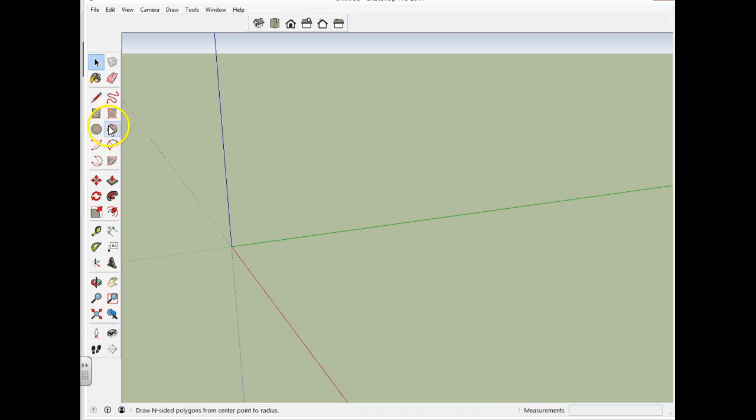Okay, we're going to begin with a rectangle. This rectangle is going to be, let's call it about 27 feet long. If you're over 20 feet, that's good. What we're going to do next is just raise that rectangle up so it looks approximately like this. After that, I want you to come in. Okay, now it's quite a bit shorter.

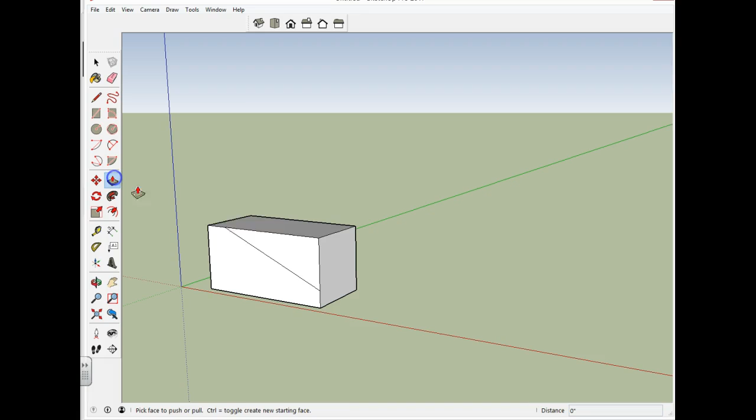I'm going to come in with my pencil tool, and we're going to touch right here and down to the base, and then push that area away so we're left with a shape that looks like a ramp with two flat edges on it. What I want to teach you about today is the tape measure tool, and that's what we'll do. We're going to find out several different ways to use our tape measure.

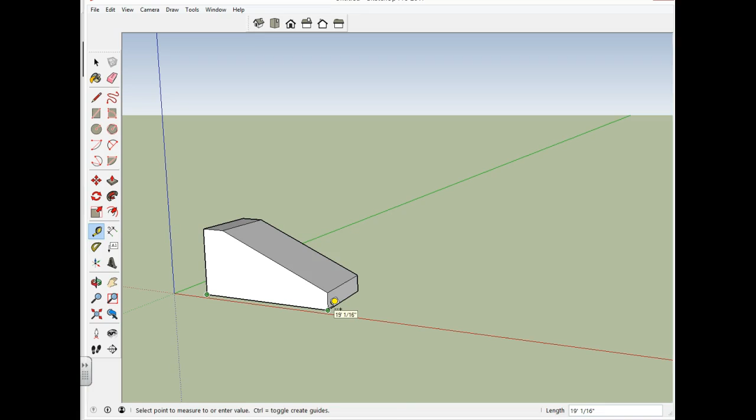So from endpoint to endpoint, you can see I'm about 19 feet long. I want to make that bigger, so I just type in 20 feet and resize. Okay, now that we've got that taken care of, we're going to come over here. Once again, we're going to use the tape measure tool, and now we're going to cross diagonal end to end.

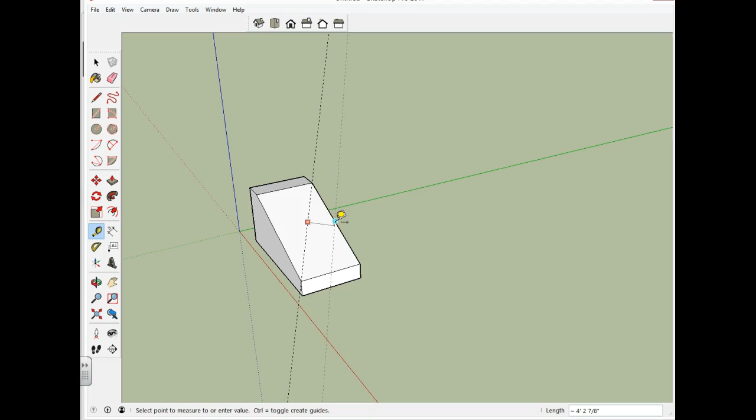And I want to show you that you can offset that by just inferring the middle. You can see how that becomes something to itself if I can find the middle here. And now these are both offset on the face to the midpoint. We're going to come across on the other, and this time we're going to infer no geometry, so don't infer anything, but type in 2 feet, and then it will become the 2 foot mark over, like that. Come over here.

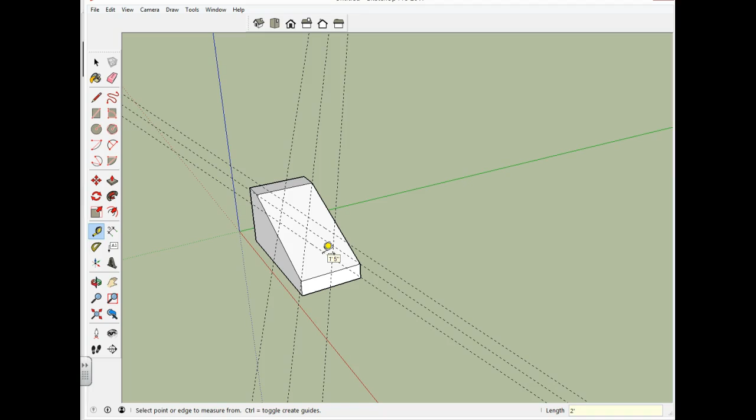It may ask us, hey, do you want this to be 2 feet? If not, just type in 2 feet again, and now you're going to have that offset where it needs to be. We're going to come in with the pencil tool, and we're going to make sure that that all gets squared away. Make it just like this, and now come back with a 2-point arc, and from endpoint to endpoint we can come up and hit that. Good.

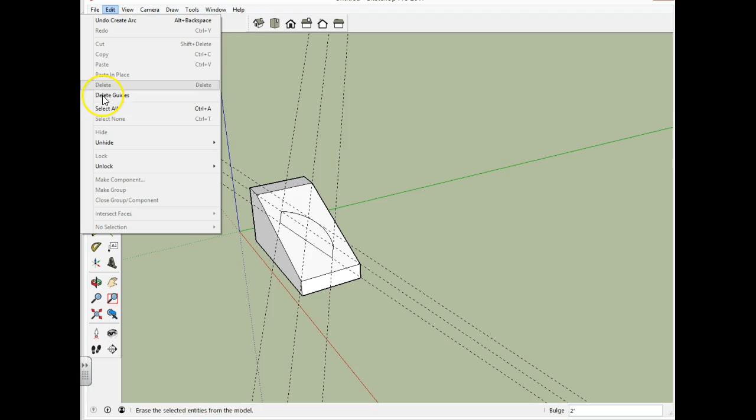Now let's go in and delete our guides. That was just edit, delete guides, and the guides go away. We're going to use another tape measure, this time from the midpoint going straight up in the air, so I can show you that push-pull actually works. If I infer to that line, it will go right as high as that line, and that's it. So that's how that works.

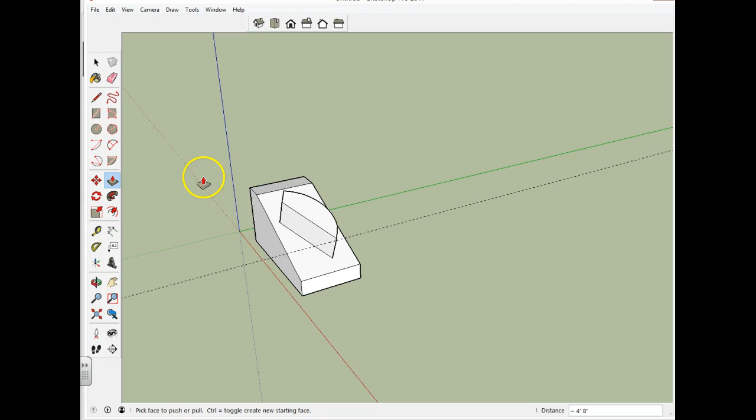What we're going to do next is come back in with another tape measure, but this time I'm going to make sure that I don't infer any geometry. When I click and it's on red, you can see how those cross references happen. And now I'm going to go out and make another line from that intersection at 25 feet. So click that, 25 feet. We now have another line we're going to start from.

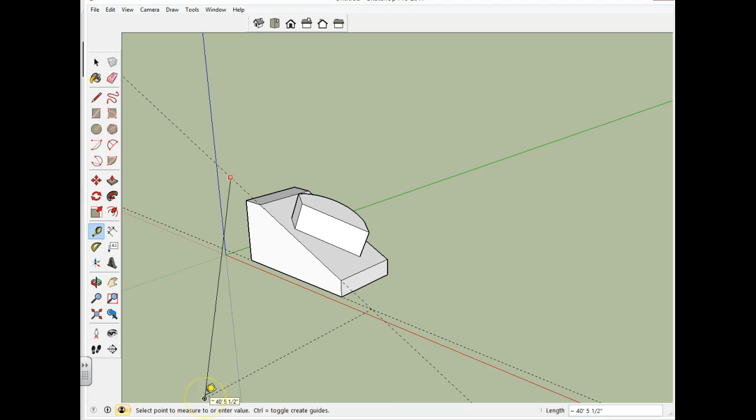I'm going to click on that line and then to this line down here, point B, that reference line. And what I am going to get when I do that is a reference point that's parallel to the red. It didn't look like it, but it does from this angle. Pull straight up, so you click, get that reference line in there, and now you have another triangle.

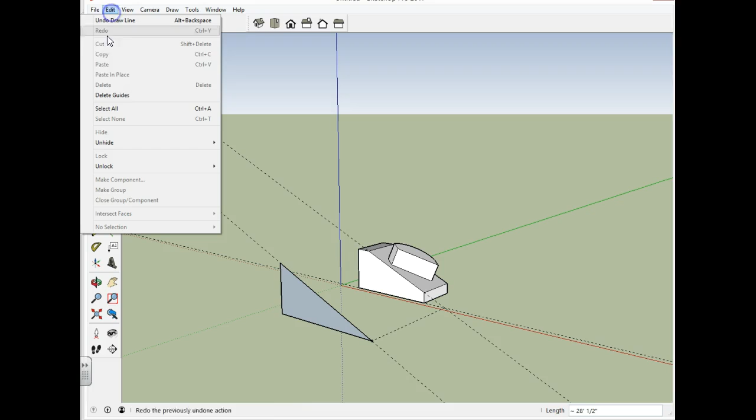It's moving along really quickly here, so we're going to push-pull. Oh, I guess we'll delete our guides, and then we're going to push-pull right here. And just push that over some ways. And pretty much we're getting done here. What I want you to do next is just come in here with the tape.

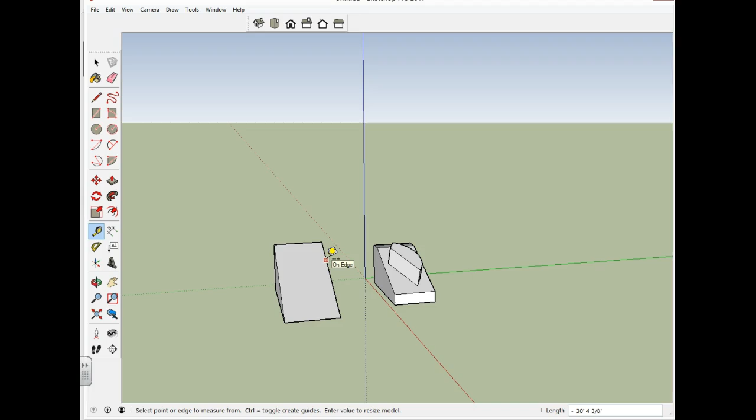And I want to show you that if you click on something and then hit Control, the plus sign goes away, and what you're left with is just a measurement of that without getting a guideline, which is kind of nice. So if you ever just want the measurement without the guideline, make sure you hit Control so the plus sign goes off, and then you will notice that there's nothing there for it. No guideline.

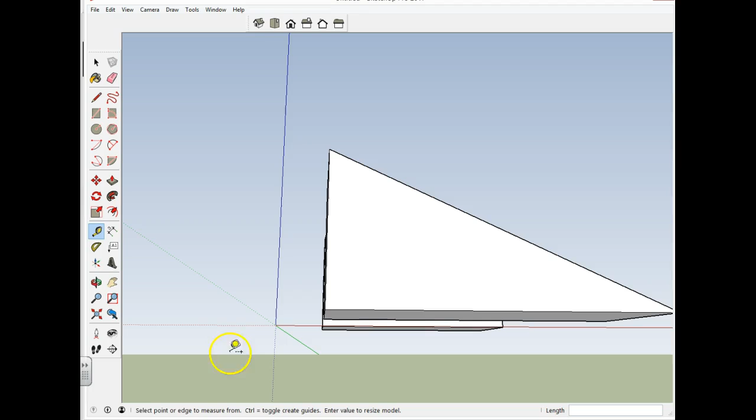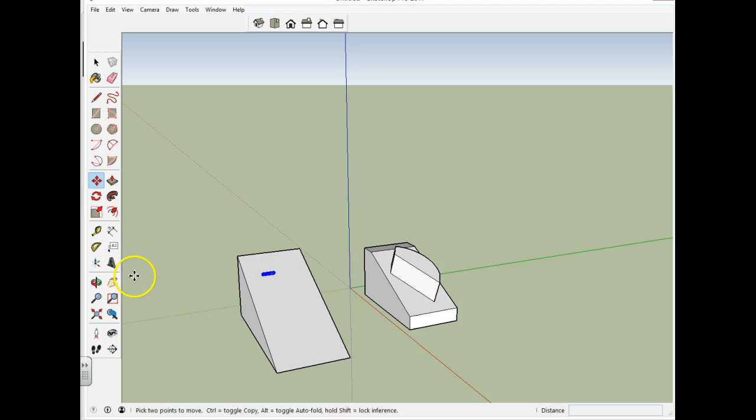Okay. Well, that's about it. You can see these are in the same plane of existence now, and that's how you can use a tape measure to infer certain geometry. Let's type in tape measure or measuring tools and put it right on the face of something. You can go ahead and paint that in, and once you have that set up where you want it, you can always make it larger by scaling it up. I have to scale mine up because it comes in by default so small.

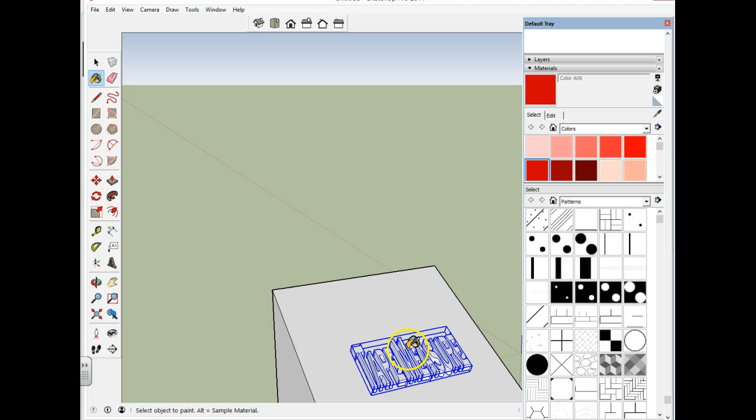So I've got that right there. I'll put some paint across that. And then if you really like what you see but you don't like the view, you can go down to your zoom extents. That's the little magnifying glass with 3 arrows coming out of it. And when you do that, you get a really good look on your piece.